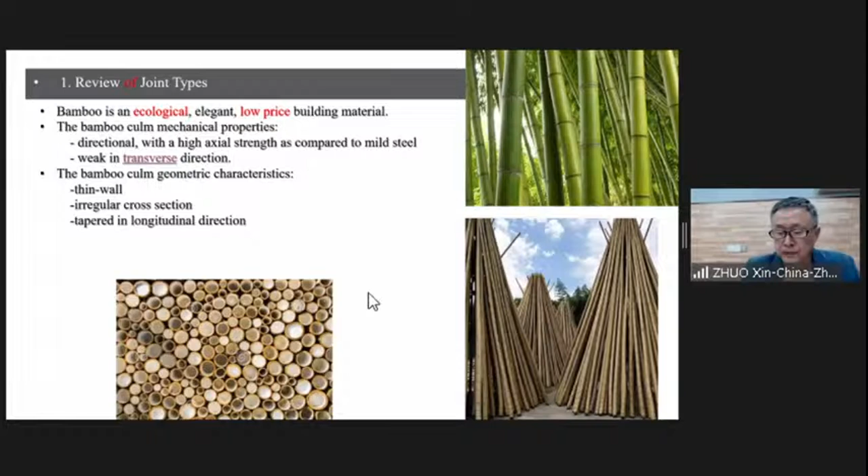Bamboo is an elegant, ecological, and cheap building material. The culm mechanical properties are directional, with a higher axial strength compared to mild steel, but weak in the transverse directions due to the geometric characteristics of the thin-walled, irregular cross-section and tapered in longitudinal direction. Neither can we change the diameter and thickness of culms. The main advanced technologies in timber structures are not suitable for bamboo structures. The joint is the key for structural performance.

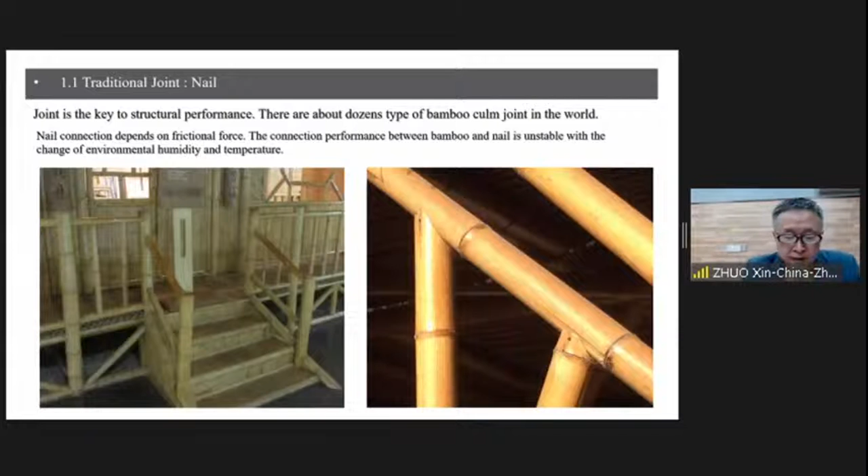There are dozens of bamboo culm joints in the world. Traditional joints use nails, rope, and other materials. For example, fishmouth joints weaken the bearing capacity of the joint. The connection depends on friction. The connection performance between bamboo and nail is variable under different environments. Lashing is the most commonly used traditional joint in the world.

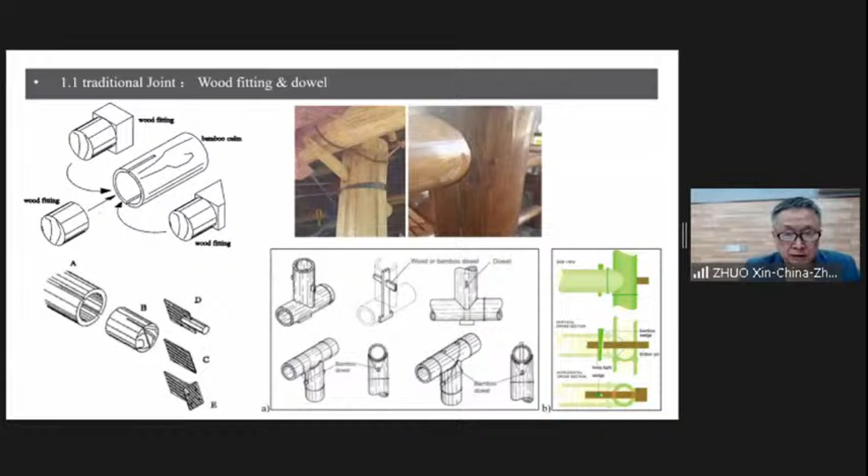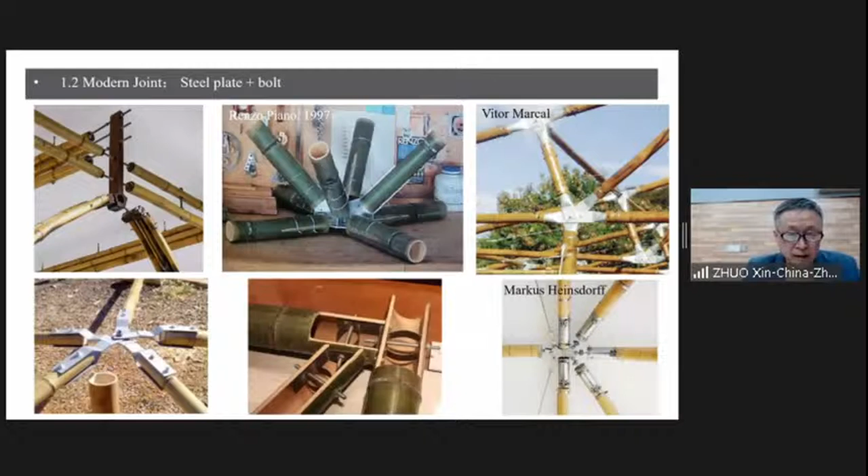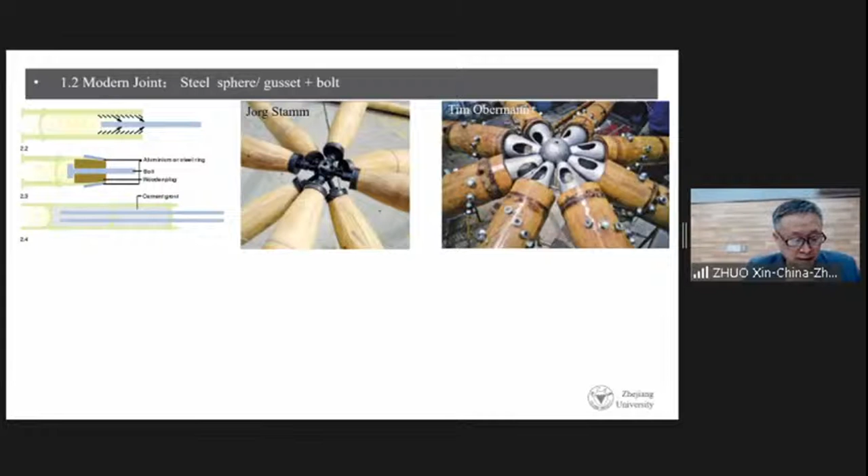In the past decade, many modern joints have been invented by researchers from various countries. These joints are made of concrete, metal, grout, and other materials. Many of them are suitable for special structures. Modern types of bamboo joints have made great progress in the functional diversity and connection performance. However, the price of modern joints is generally high. The cost is very high, and some are even dozens of times higher than the bamboo itself.

Now, we have mentioned most of the present joints. Although they are different in materials or forms, they have one thing in common. They all follow the relationship of line-line connection, which is written in the textbook of structural mechanics. Let's talk about spatial structures. First, each joint connects many members at different spatial angles, which makes manufacturing as well as assembling quite difficult. Second, in spatial structures, almost every joint is different from the other joints, which makes manufacturing and assembling even more difficult.

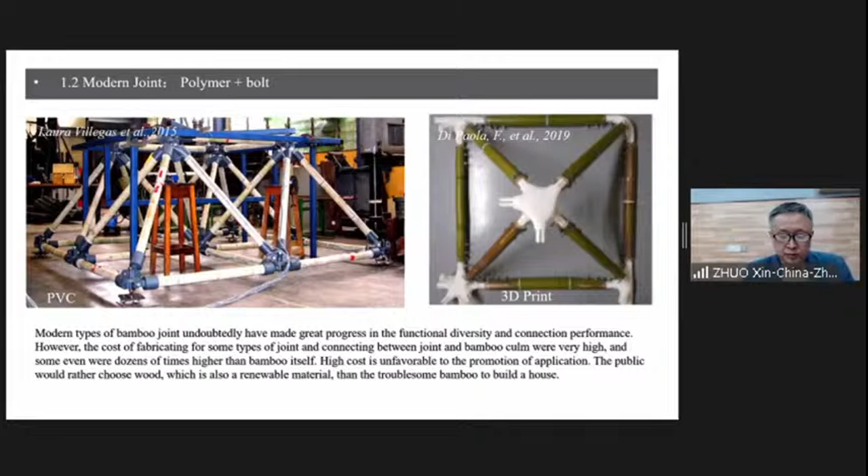In bamboo structures, the main cost is spent on two things. One, the production of this complex multi-directional joint. Two, the connection between the joint and its corresponding members. Higher cost is unfavorable to application. The public would rather choose wood, which is also a renewable material, than troublesome bamboo to build a house.

Next, I'll introduce what my team has done. In my opinion, in engineering application, the simpler, the better. Simple means simple joint, simple equipment, simple operation. Better means low cost and good performance. Four objectives achieved: simple manufacture, convenient assembly, low cost, and reliable performance.

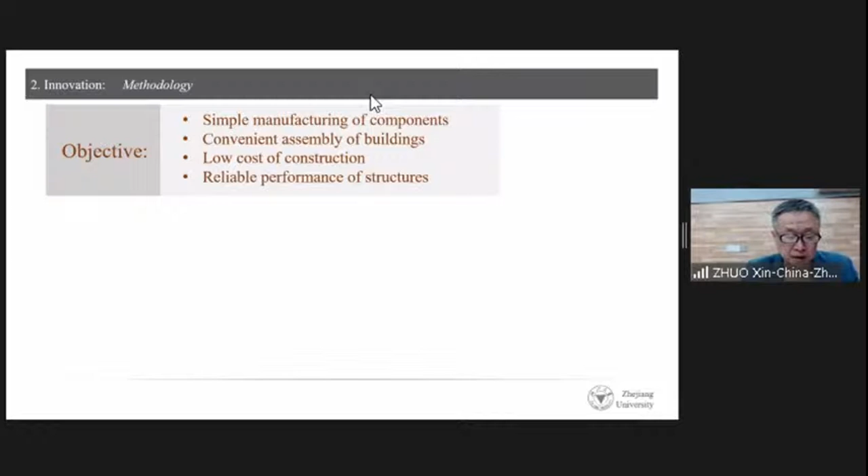4 years ago, I invented a new type of joint named double ring crab, and a new type of bamboo spatial structure named multi-culm bamboo spatial lattice structure. A ring crab is formed by two similar rings with two legs on both sides. Each leg drills a hole. A pair of double ring crab is composed of two ring crabs.

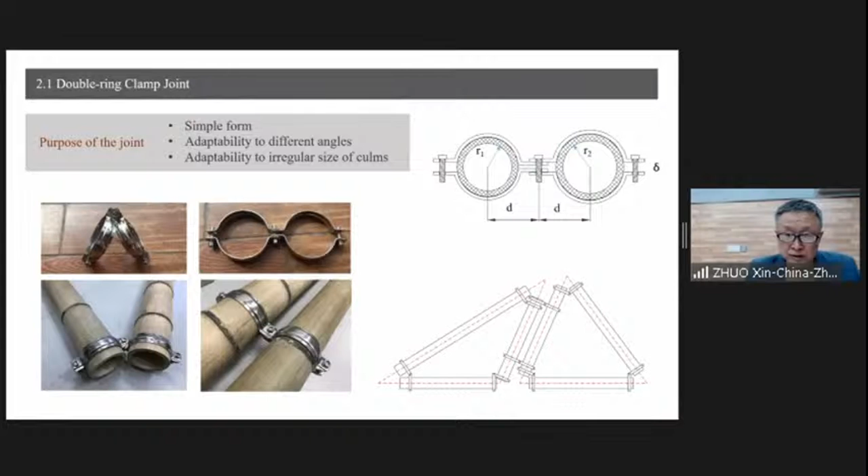A pair of double-ring clamp connects two different R1 and R2 that correspond to two culms. If the distance D1 equals D2, it's easy for manufacture. No matter how different these nearby culms are, the axis position of these bamboo culms will not be affected, either in end connection or in parallel connection. This function is very helpful to control assembly accuracy.

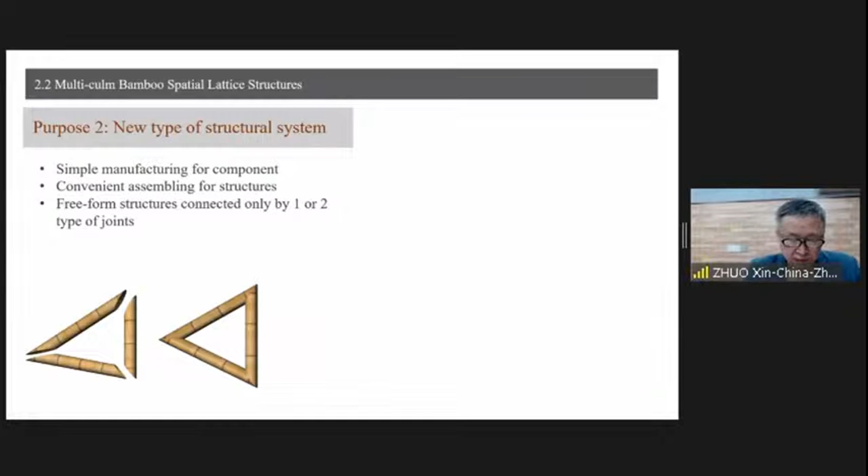And the next invention, a new type of structural system. A bamboo culm looks like this photo. A bamboo culm triangle is formed by connecting the ends of 3 bamboo culms to each other. Multi-culm bamboo spatial structure is formed by connecting neighboring triangles in parallel. If each triangle is connected to the top triangle in parallel, the stiffness and the bearing capacity of the multi-culm bamboo spatial lattice structure can be strengthened.

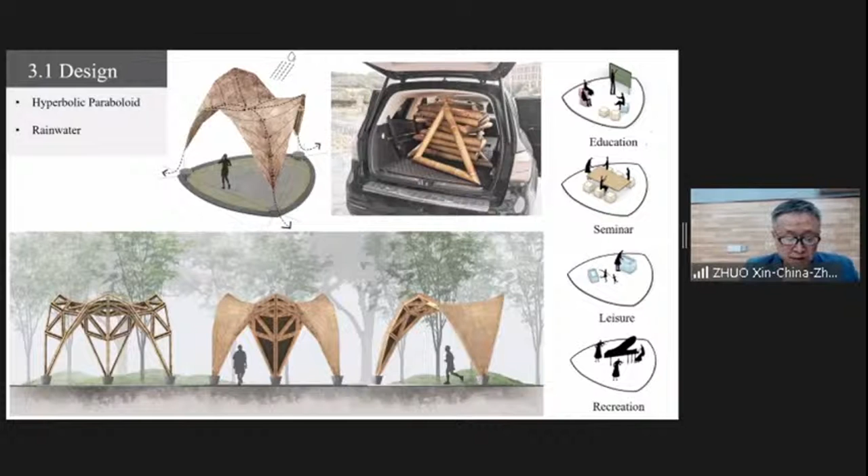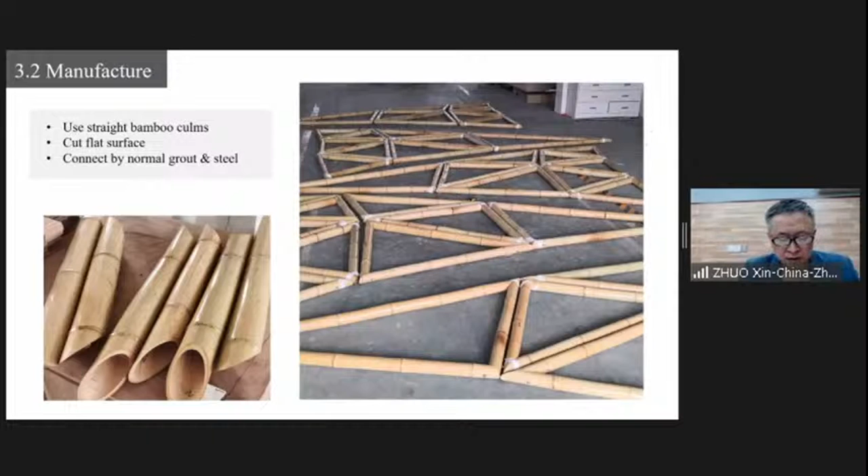Cutting. The culms were cut according to the design lengths, and the 2 ends of each culm were cut according to the designed angle. Connecting. After the culms had been grouped, the corner of each angle was temporarily fixed with tape, and then cement mortar was injected into the corner.

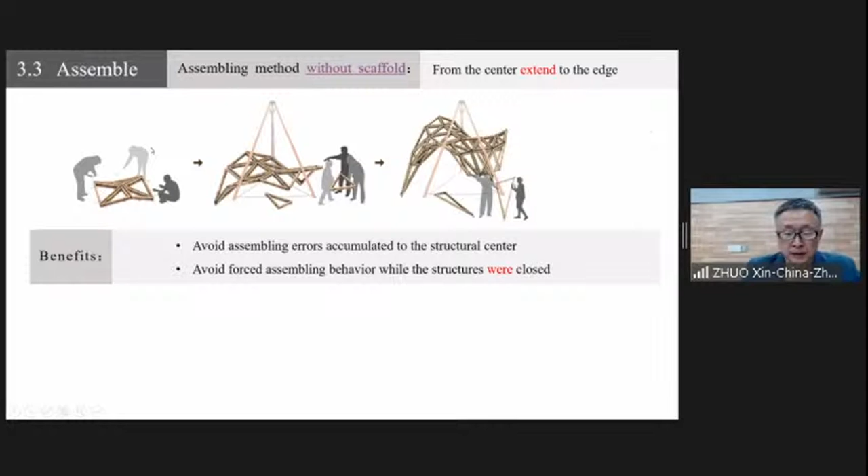We chose the install method, which was from the center to its edge. The whole structure can be completed simply with the help of a tripod and a hand chain hoist. No scaffold was needed. It takes 1 day to build the structure, and the installation of the internal and external decoration was also completed in 1 day.

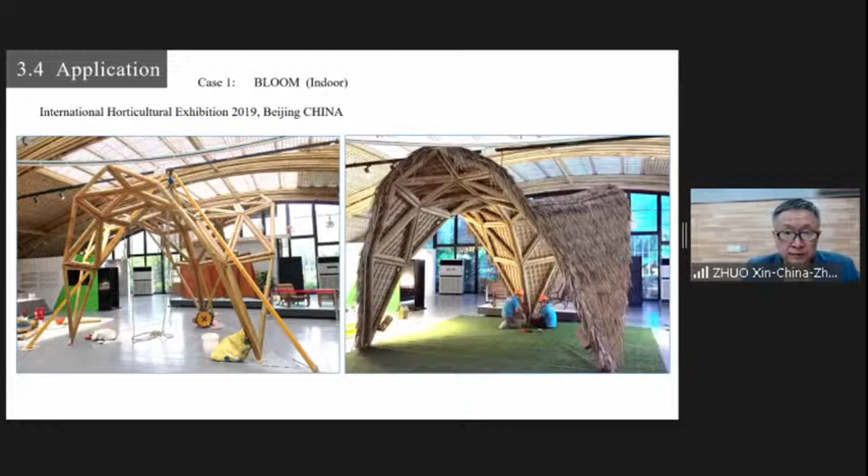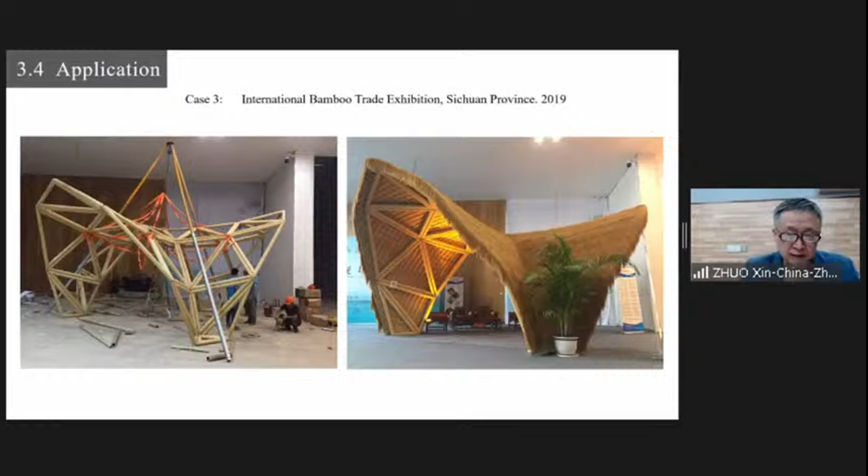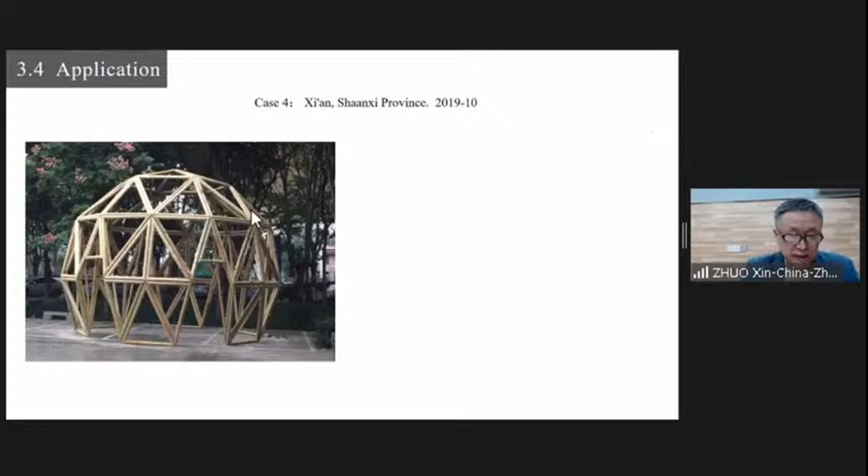Case 4 is in Xi'an. It's a dome. The finished structure had good stiffness.

Conclusion: the feasibility of the invention could be proved by the series of successful engineering practices. The development and popularization of a new structural system needs the support of design theory, which will gradually be established on the basis of a large number of tests and engineering practice.

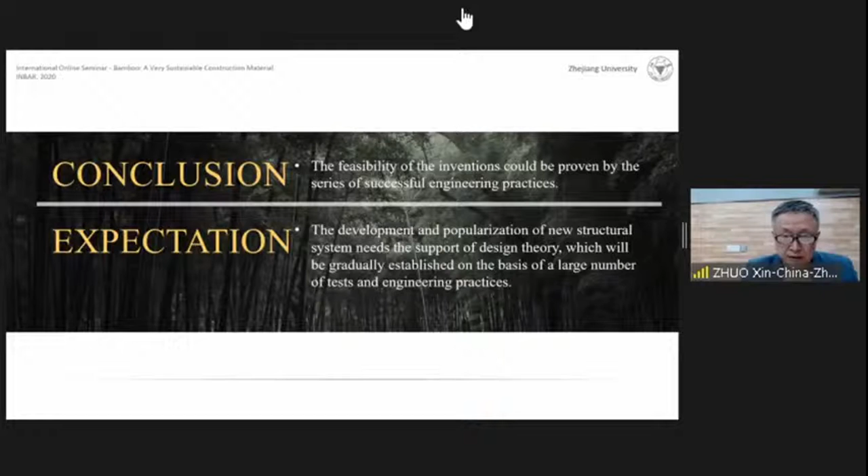So many thanks, Professor Zhuo, for providing us an overview of the joinery types available in bamboo construction, and also an innovative multi-culm bamboo spatial lattice structure. As we know, the triangle is one of the stable forms in construction, and it has wide application. The structure is in the form of components and triangles. It also provides scope for prefabrication and commoditized bamboo houses, and it is also possible to scale it up.

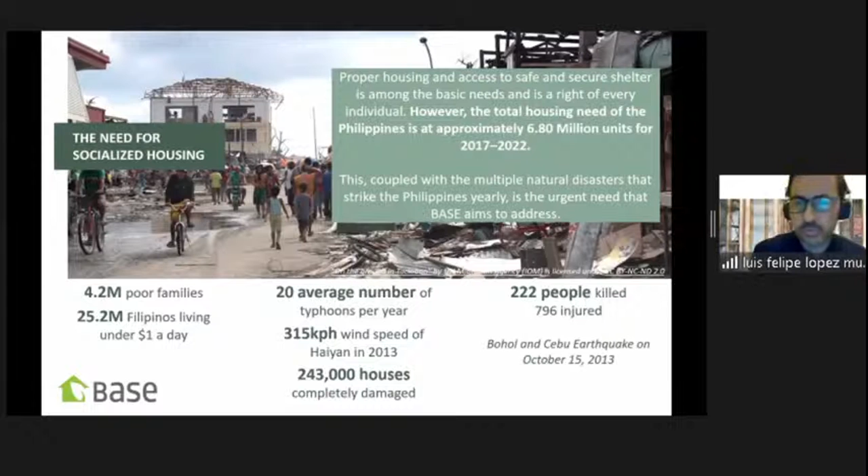At the same time, the Philippines is located in the Ring of Fire of the Pacific Ocean, so we have earthquakes, tsunamis, volcanoes. All the possible natural disasters are here in the country. So there is a lot of work to do in structural engineering, but also in trying to find solutions for housing that is affordable but at the same time resistant.

This story started in 2011 when a German engineer, Corinna Salzer, was working on her master's thesis. She was doing her research here in the country, supported by Hilti Foundation, exploring possibilities to work with natural and local materials for social housing here in the country. In 2012, Hilti Foundation contacted me, and I was working as a consultant together with Professor David Trujillo, and we were supporting the research here in the country.

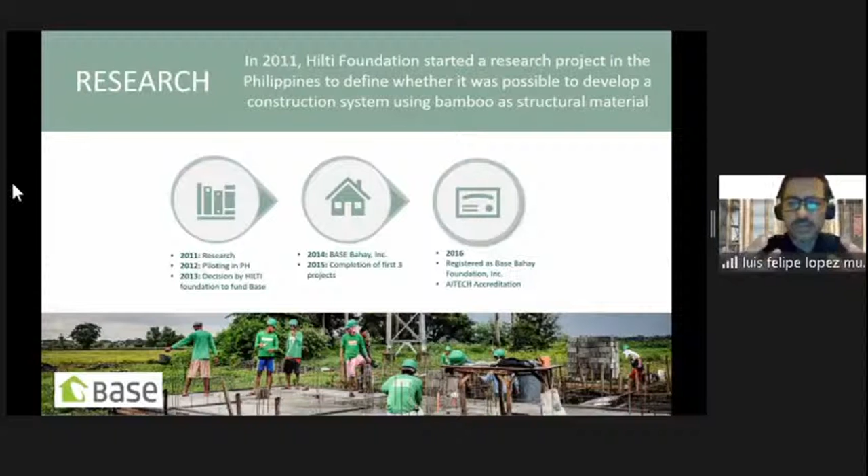In 2014, Hilti Foundation decided to create Base Bahay Foundation in the Philippines. I moved to the country and we started to work on research more deeply, but at the same time building homes in the whole country. In 2015 we completed our first 3 projects. In 2016 we got our AITECH accreditation, which allows us to get building permits in the country.

So Base Bahay is a Philippine NGO fully supported by Hilti Foundation, and our objective is to provide alternative building technologies that enable us to build houses that are affordable, resilient, resistant, and eco-friendly for the poorest people in the Philippines.

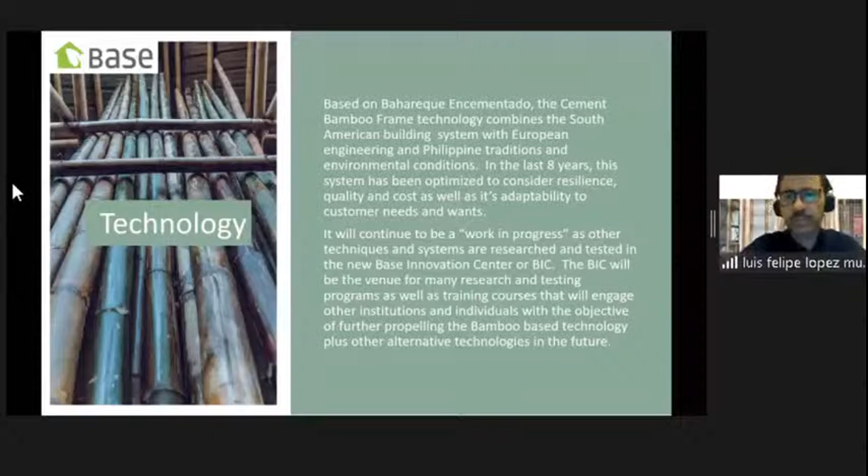Our technology is based, but not copied, I want to clarify, from the bahareque, cemented bahareque or bahareque encementado from Colombia. But we need to understand that in South America, especially, there are no typhoons, so the structures are more designed for earthquake resistance, not typhoon resistance. In the beginning we took some components of the bahareque technology from Colombia, especially because at that time the bahareque technology was already included in the building code in Colombia. That helped us a lot because it's a system that is already normalized. Even other countries like Ecuador and Peru already include this technology in their building codes.

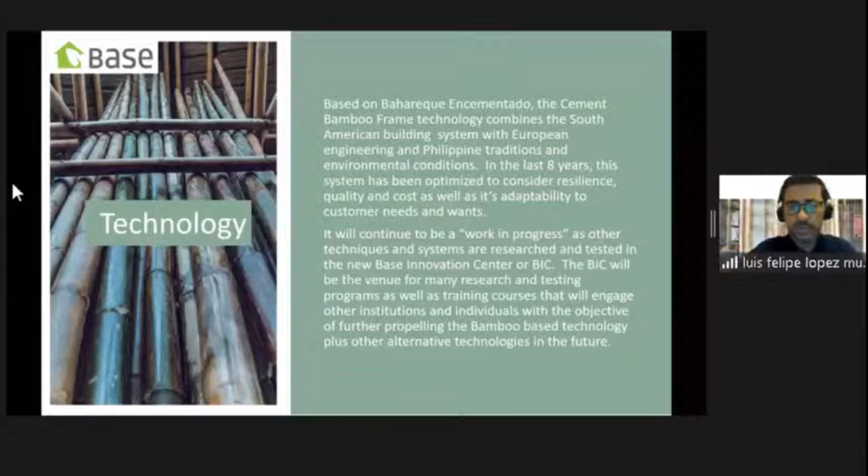So we took that technology as a start, but we had to improve a lot of connection systems and reinforce the construction more to resist the strong winds and the uplift during typhoons. At this point I just want to clarify that when we are talking about bahareque or cement bamboo frame technology, as we call it here in the Philippines, we are not talking about this kind of bamboo structure that I'm showing you all at this moment on the screen.

These are more like three-dimensional trusses or space trusses, very common in the work of Simón Vélez, for example, or other architects around the world. Beautiful structures where bamboo is the main structural component. But in the system we're working with here, as you will see in the coming slides, we are working more in a system like a shear wall or a structural wall system, where the walls are the structure of the construction. That means they're responsible to resist vertical loads and horizontal loads.

This technology, as I mentioned, originated in the 19th century in the coffee region of Colombia. Here are some samples of the construction techniques used at that time. You can see that even 3-story and 4-story buildings were normal then. The system is just a frame made of bamboo, sometimes with timber, using flattened bamboo as support for the plaster, with a cement plaster once cement was available, and before that, the people used lime with some animal excrement.

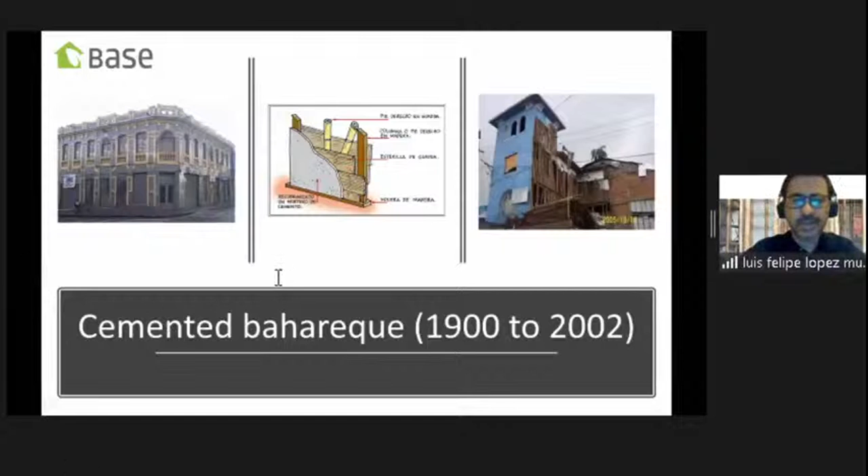Coming to the Philippines in 2012, we decided to use the bahareque system as a base. But the species of bamboo in the country is completely different from the species we have in Colombia. In Colombia, you normally find Guadua angustifolia Kunth, but here in the Philippines, the most common bamboo is called Bambusa blumeana, or locally Kawayan Tinik. So the first task was to determine the mechanical properties of Bambusa blumeana and also the resistance to conventional connections using bolts, and even plus mortar cement inside the internodes to check the resistance.

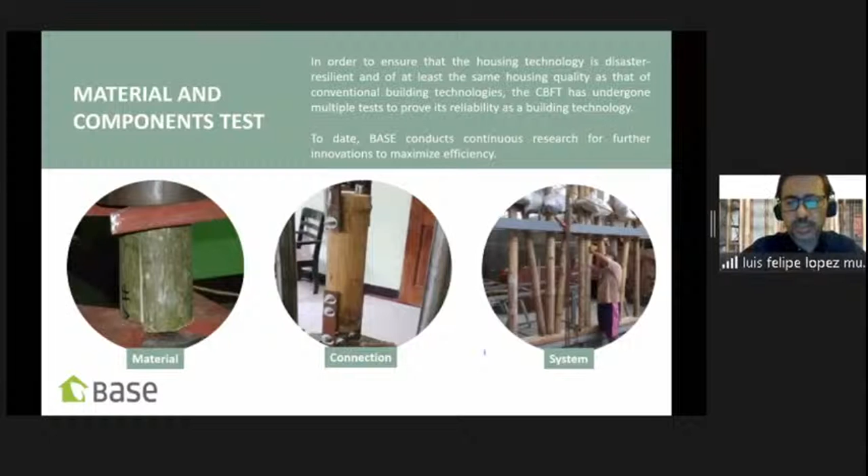So we made tests for mechanical properties, connections, and walls. Here are some pictures of the tests we are doing. These are new pictures, not from 2012 - these are from this year, in our new laboratory that I will show you.

For the tests we did in 2012, we used ISO 22157, the previous version. Here is some data of the results we got at that time: compression parallel with a characteristic value of 20 megapascals, shear parallel 4.1 megapascals, tension parallel 97 megapascals, tension perpendicular 0.53, bending 53 megapascals, and modulus of elasticity 17 gigapascals.

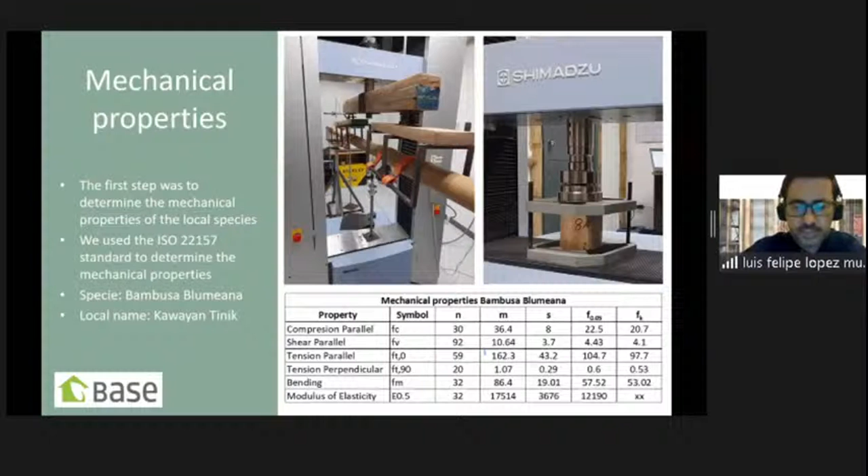We also made some tests for Dendrocalamus asper, or giant bamboo, that grows very well here, especially in the southern part of the country, in the Mindanao Island region. We have already conducted tests like compression parallel, shear parallel, and tension perpendicular, getting characteristic values of 43.7 for compression parallel, 6.3 for shear parallel, and 0.33 for tension perpendicular. We are still testing this bamboo - in coming days we'll be testing the bending and the rest of the properties.

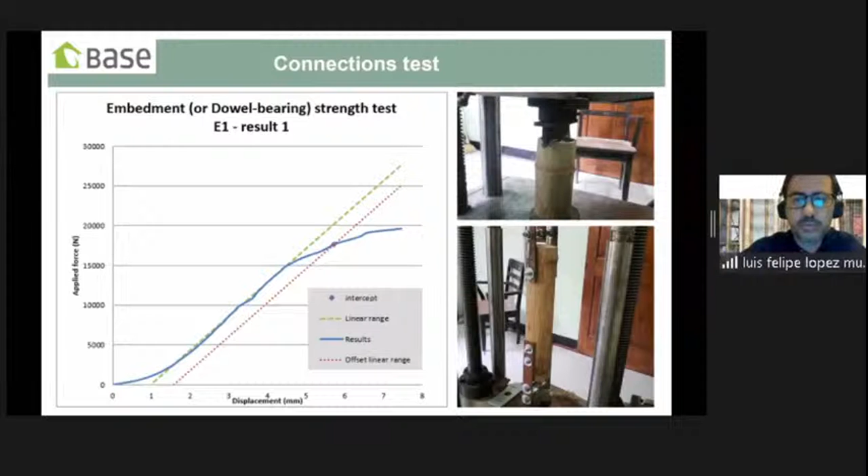We also test walls, shear walls, starting from just the frame, adding the bamboo mats and the plaster. We test different kinds of matrix like flattened bamboo, ribbed lath mesh, chicken wire mesh, and using cement plaster to check the resistance.

Internationally, we also conducted some tests in Indonesia for shear walls using Indonesian bamboo species. We did this together with the Bandung Institute of Technology, ITB. There we made some tests also for shear walls and mechanical properties of Indonesian species.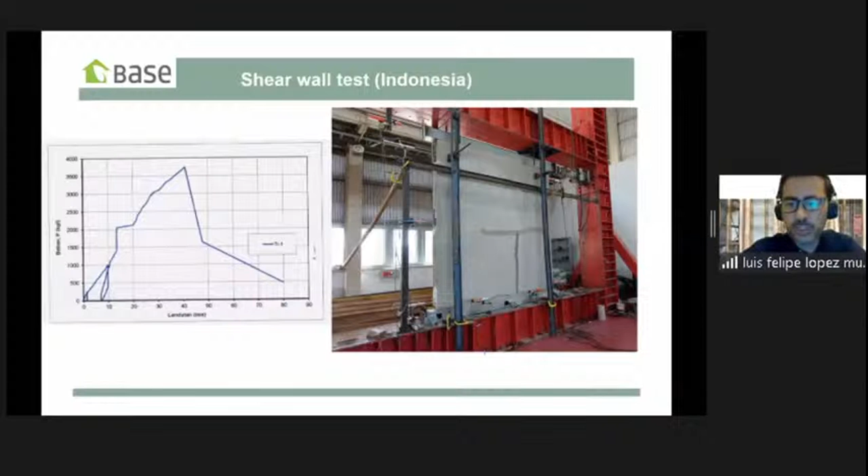And even in Indonesia, also with ITB, the Bandung Institute of Technology, we made some tests for fire resistance, using ISO 834-1 to determine the resistance of the bamboo walls against fire.

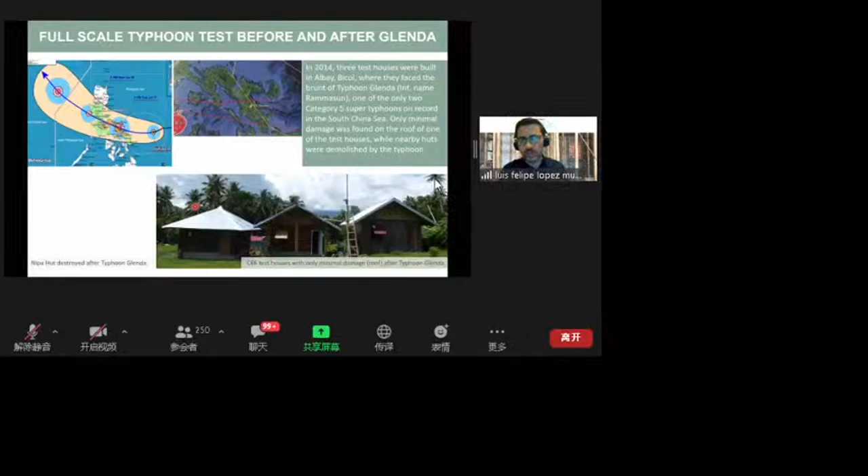One big question about the research, about the system, if we can use it here in the country, is if these construction houses can resist typhoons or not. Because as I mentioned before, in Colombia, where the system originated, we don't have typhoons or hurricanes. Only the north part of the country in the Caribbean Sea can be hit by typhoons, but in the central part of the country, there is not this kind of natural event.

So we decided to make a test with 3 full-scale houses that we built in a province called Bicol, in a town called Guinobatan. You can see here part of the Luzon Island and the Bicol province, and this yellow pin is the location of the houses. So why did we choose this location? Typhoons here have winds more than 220 kilometers per hour.

So we built these 3 houses. We installed a weather station, a satellite weather station, where we can monitor the wind speed, and we just wait for the typhoon. These houses were built in 2013, and in 2014, around 6-7 months after we finished the houses, we had the first typhoon hitting these houses.

It was Typhoon Glenda. It was a super typhoon, category 5, and we were recording the wind speed during the event. After a few days, we were able to reach this place and take this picture. You can see the condition of the house is good. The house didn't suffer any damage.

Only this small broken GI roof, which you cannot blame on the system. It's actually a problem of how the roof was fixed to the structure, but in any case, there is not a damage that compromised the stability of the house.

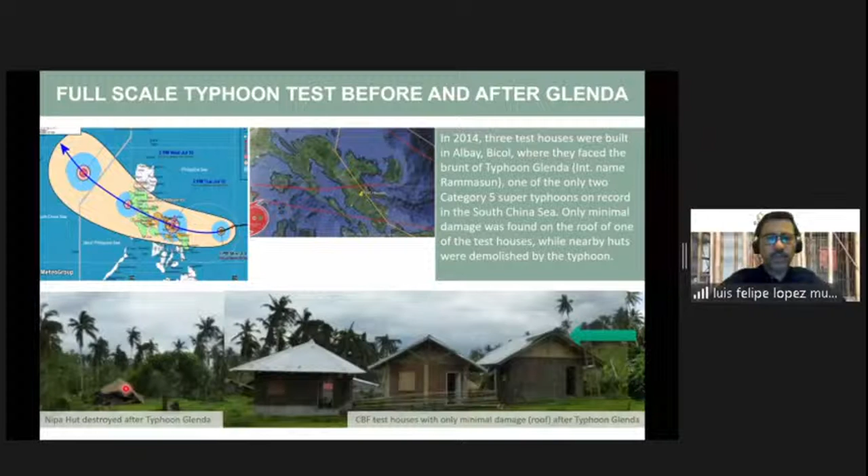So at the end, we developed this system that is typhoon resistant, earthquake resistant, fire resistant, and insect resistant, because we treat all our bamboo poles with a very good treatment method that allows us to be sure that the insects will not eat the bamboos. I won't speak more about treatment because I know Sebastian was talking about that in the last presentations.

So here you can see more in detail the components of the house. Starting from top to bottom, we have a roofing system using any commercial material. You can use galvanized iron sheets, clay tiles, shingles, asphalt shingles, whatever you want to use is compatible with this system.

Supporting that, you have a kind of truss or frame system in the roof using purlins and rafters, but for that we always use bamboo and sometimes a combination of bamboo and wood. The structural main system is a shear wall system made of frames of bamboo. We call it cement bamboo frame system or cement bamboo frame technology. We use studs made of bamboo, and horizontal elements made of timber to avoid the use of fish mouth connections. That allows us to prefabricate the walls very easily and reduce the cost of the house.

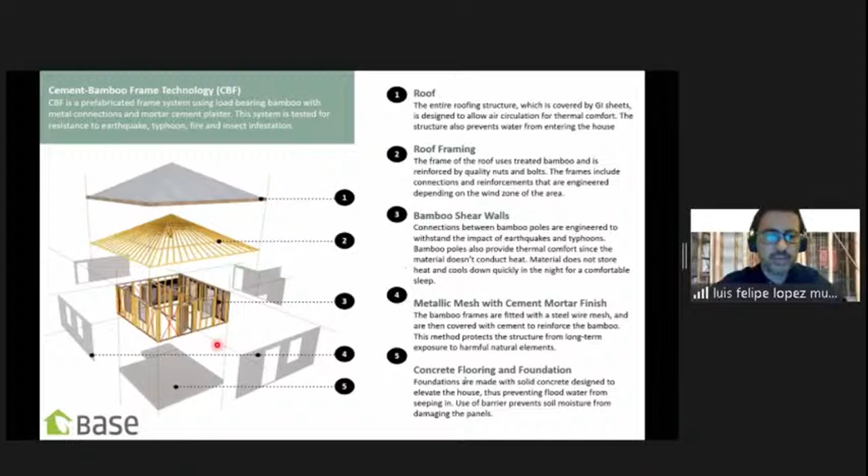When you are building social houses, every single peso, in this case, because peso is the money in the Philippines, every single peso that you save is money for the next house. So we need to be very careful about the cost of these houses. And at the end, you have a concrete foundation, a conventional foundation using footing beams and a concrete slab.

As I mentioned before, we got the AITECH accreditation in 2016. This is an accreditation given by the National Housing Authority here in the Philippines. With this AITECH accreditation, we are able to build these houses legally and get building permits, even if the system is not yet included in the building code. So we had to prove to the National Housing Authority that our system is safe, is a good alternative for social housing construction, but especially that we need to guarantee that the houses will not fly away in the next typhoon or collapse in the next earthquake.

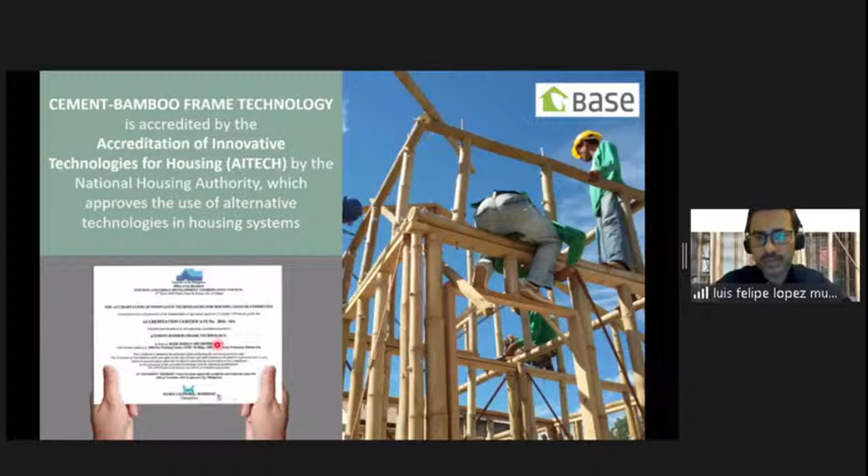So we need to show them all the proofs of the tests that we did.

I don't want to go into this too much because you already know why bamboo is good. It's a sustainable harvesting and good income material. It's strong, grows so fast, and the carbon footprint of a bamboo house will always be less than a concrete or steel house.

So one thing we had to do here in the Philippines when we arrived was create the entire value chain for bamboo. It's true the country is full of bamboo everywhere, but there's no industry for the production of bamboo. So we needed to develop a value chain with the people of Base Bahay, the team that does incredible work, working very hard to create these facilities together with other partners around the country.

We have a team of local engineers, and I want to clarify, I'm the only foreigner in Base. The whole team is Filipino, and they work so hard to make all these things happen. They go to the provinces, work with local farmers, and create these facilities, helping them build and process the bamboo.

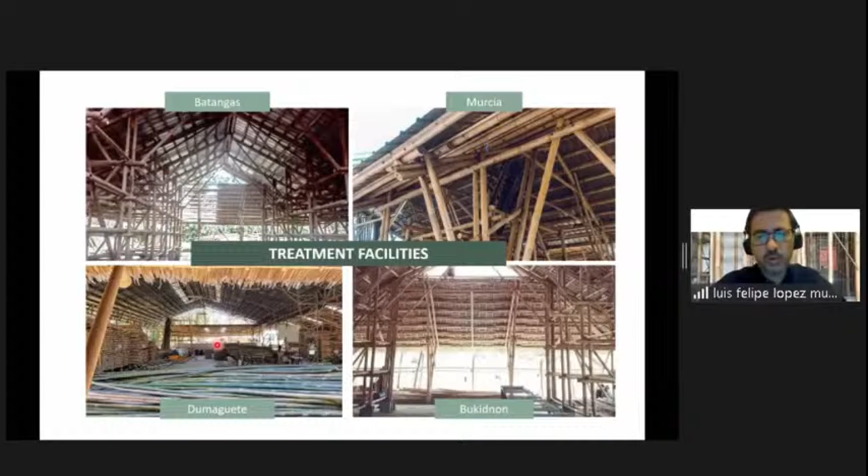Right now we have installed capacity for production of something between 8,000 to 10,000 pieces of bamboo per month. Unfortunately, during this year, production is very low because the pandemic hit the Philippines very hard.

So these are some of the model houses we are building in the country. We have 2-story houses, duplex houses, bungalows, and even row houses of up to 4 houses all connected.

Some of our projects are almost in the whole country. We are soon starting a project in Mindanao, the last province where we don't yet have a build. We are starting a project in January, 50 houses in Bukidnon province in Mindanao.

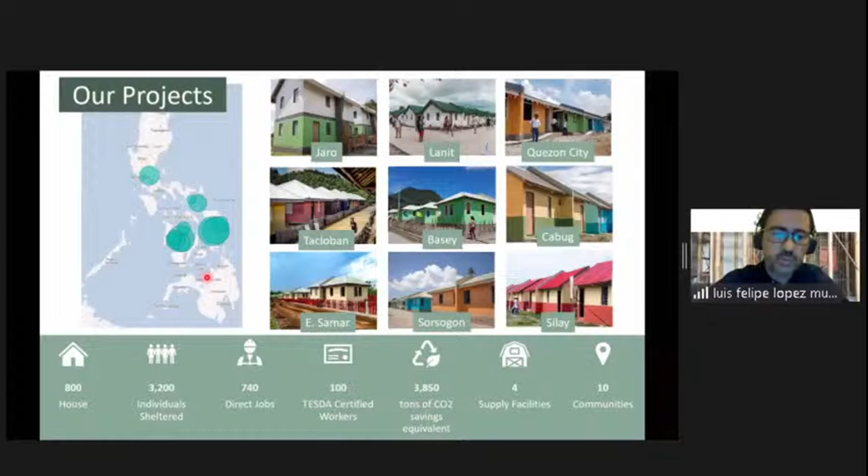Until now, we have already built 800 homes, giving shelter to more than 3,000 Filipinos, creating direct jobs and saving a lot of carbon, with more than 10 communities built in the country.

Aside from that, we started our first international project this year in Nepal. It's a project completely supported by Hilti Foundation, with all the technical support from Base Bahay, and the implementing partner there, the main partner in the country, is Habitat for Humanity. During this year, even during the pandemic, we were building 34 homes in the province of Jhapa in Nepal. Hilti Foundation has already approved 50 houses for next year in Nepal.

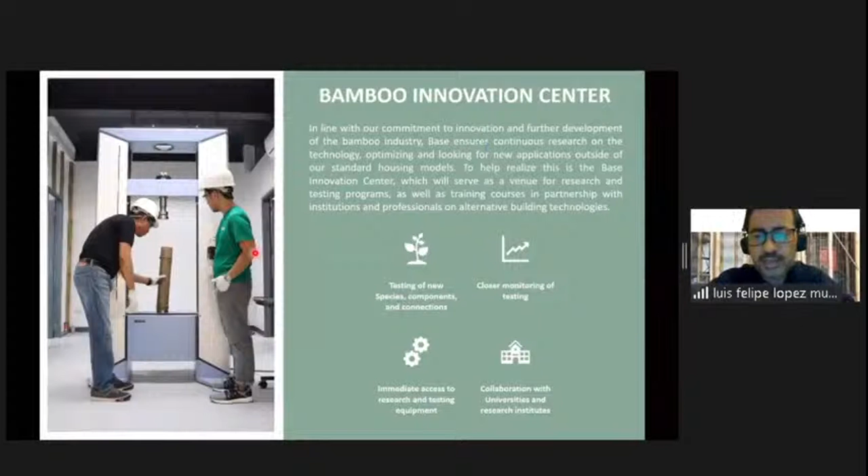With these communities, we also work on building communities for social work or even livelihood projects. Aside from all these social projects, last year Base Bahay together with Hilti Foundation decided we wanted to go one step forward and create the Base Bahay Innovation Center. That's a laboratory focused on research of sustainable materials, with emphasis on bamboo construction, of course, but open to other materials like wood and whatever is new in the market. It's a small laboratory, but the interesting thing is we are focused on bamboo, so we can make a lot of tests.

Right now we have a universal testing machine where we can determine mechanical properties. We are finalizing the setup of our reaction frame where we can test more walls. We also have an area where we can make full-scale construction models. On the right side of the picture, you can see we have a full-scale house where we can test new components, or train people to build with this technology.

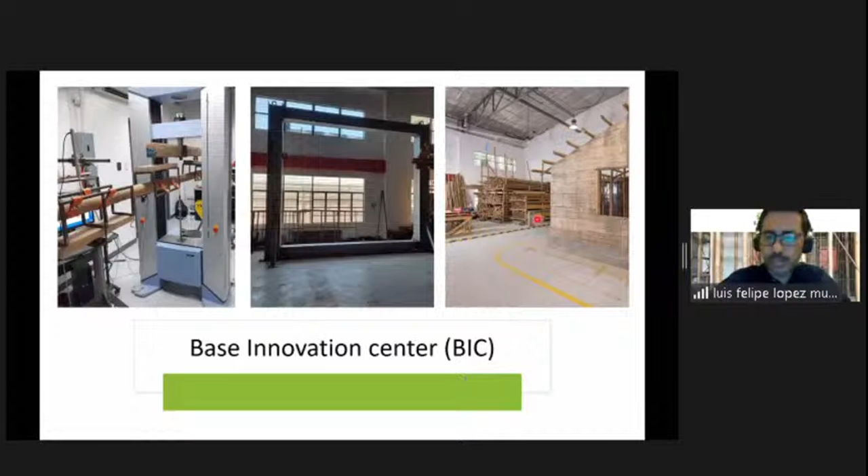The Innovation Center right now is making agreements with international organizations and universities to promote bamboo research. Of course, our main donor and partner is Hilti Foundation. Our main local partner here in the Philippines is La Salle University, with whom we've been working for more than 3 years doing research. We are signing MOUs with international universities like Coventry University and Mara University from UK and Malaysia, and we have 3 agreements under negotiation, one with Hong Kong University of Science and Technology, another with Pittsburgh University, and the last one with Universidad del Valle from Colombia. Aside from universities, we are also working on research with ARUP, together with Sebastian Kaminski, who is also part of this forum.

So we want to create a network of institutions that promotes the use of bamboo, and also help students who believe in this technology and support them in research in their countries, but also help people who want to work with bamboo here in the Philippines. So we want to create knowledge that can be used for building codes, and also improve technology and reduce costs of construction with bamboo, making the system more competitive in the future.

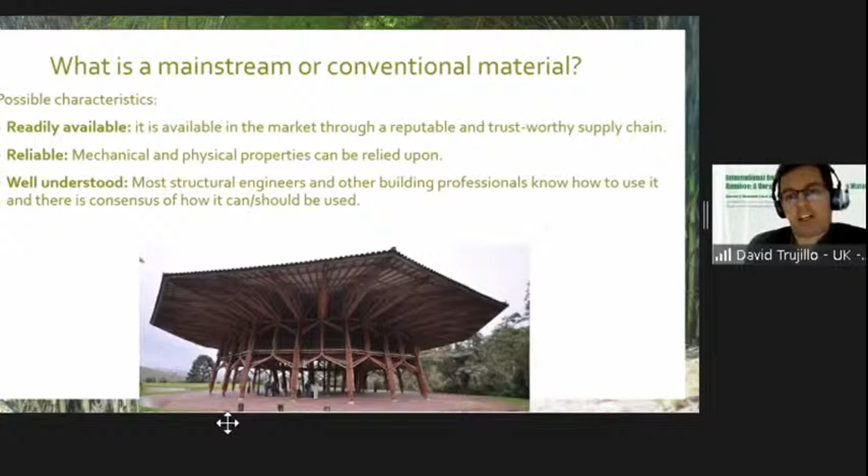Reliable. We need a material that has mechanical and physical properties that can be relied upon. It needs to be well understood, so most structural engineers and other building professionals know how to use it, and there is a consensus of how it can and should be used. And legal to use. We have national legislation as well as codes and standards that support its use.

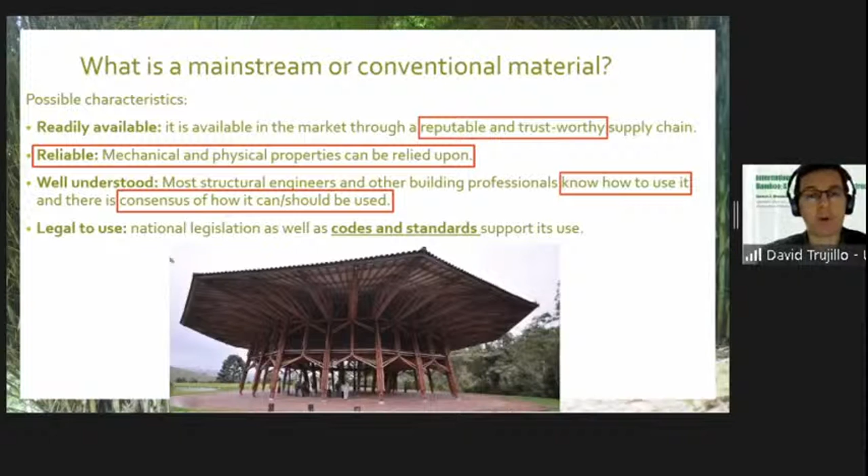So in my mind, these are the characteristics of what would be a conventional or mainstream material. You might think of some more, and I'd be really keen to hear what your suggestions are. So we need codes and standards to ensure that we have a reputable and trustworthy supply chain. We need codes and standards to help us ensure that the material has mechanical and physical properties that can be relied upon, and codes and standards that help us to know how to use the material. And hopefully those codes and standards reflect a consensus of how it should be used.

So throughout the 21st century, we have had a gradual process of development of standards and codes across the world. Interestingly, the first one was actually from California, but it's a very simple document, and it doesn't provide you any details of any species, mechanical properties, how to design a beam or column, a connection, a shear wall, or any grading. All it tells you is how to derive some design values.

Luis Felipe earlier mentioned that in 2002, there was a design standard that told you how to design some elements, primarily shear walls of the bahareque system, and it had a very, very simple procedure to design columns. It also had some guidance about how to build connections, not how to design them, and some guidance of how you should grade bamboo.

As we move forward, I think one important breakthrough, a very important code, was the NSR 10 from Colombia, which, as you can see from this chart, ticked many boxes. It only was for one species, but it stated the mechanical properties for it. It told you how you could derive the values, how to design beams, columns, connections, shear walls, and it had some guidance on how to grade the material.

There have since been several developments in Peru. There's an Andean standard in Ecuador, in Mexico, and I might be skipping something from somewhere else in the world. But I think, in our opinion, the significant breakthrough will be coming next year with ISO 22156, because it ticks directly or indirectly all the boxes. It doesn't specify any species, but you can find the mechanical properties through using ISO 22157. And it is accompanied by a full grading standard, which is ISO 19624.

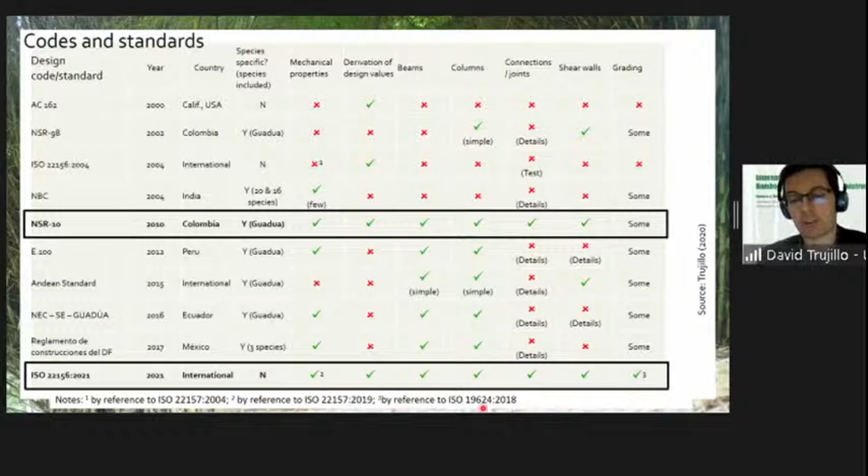So here are three recently developed ISO standards around the use of bamboo culms. And this is the one that we're expecting next year to be released. So a bit about the journey of how we got to these standards.

So we have ISO Technical Committee 165, the committee where the original ISO standards about bamboo were developed in 2004. In 2013, we felt that it was important to reactivate our presence as INBAR in ISO Technical Committee 165. And so at that meeting, working group 12 was created, bamboo structures.

In January 2015, we also felt it was important to have a task force that supported the development of these standards and other activities. As I mentioned, we have two ISO standards that have already been published. One of them is a revision of the original 2004 version, and we have coming soon ISO 22156, which we expect will be published in 2021.

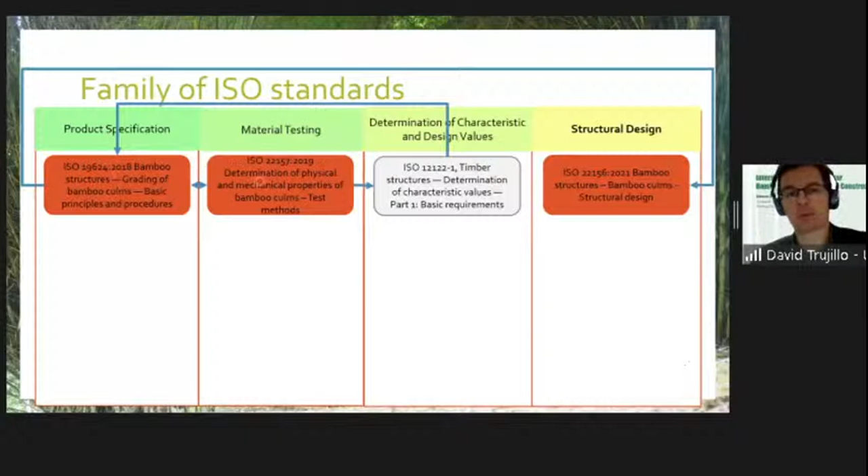So we've decided to harmonize across standards. And so, for example, ISO 19624 makes reference to 12122. And we've done a similar sort of situation with the standard that will be released next year, ISO 22156. It is linked to ISO 19624 as well as 22157, and to many other ISO standards that we're borrowing concepts from to feed ISO 22156.

So let me tell you a bit about what we've done in these standards. ISO 22157, what we have basically done is we took a good look at the existing standards and tests, and we introduced some new tests. As I mentioned, we harmonized with ISO 19624, but we also harmonized it with a timber standard for testing in timber so that they follow a similar format.

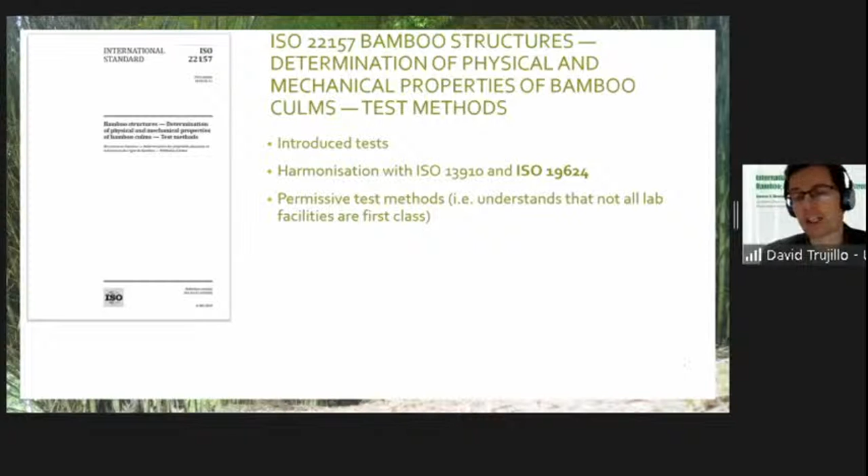And we've also ensured that we have permissive test methods, and that is that we understand that not all lab facilities are first class. So you might have some lab facilities that are not so good, and so how can you adapt the test to those lab facilities?

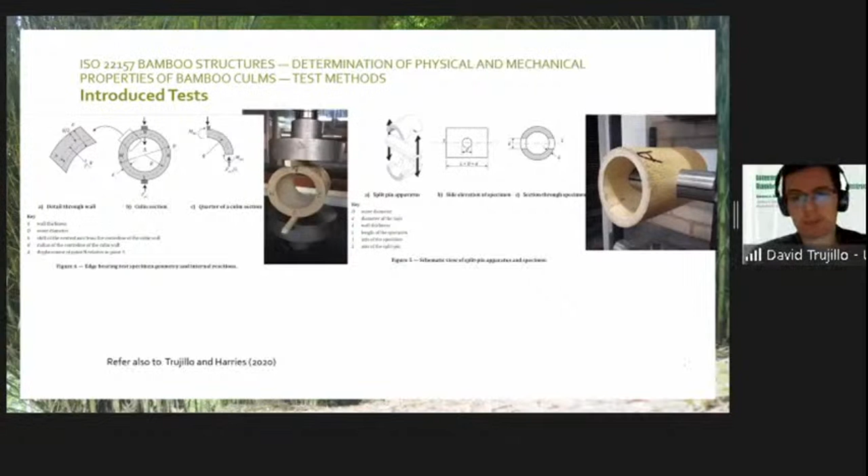In the introduced tests, we introduced the edge bearing test, shown here, and we have introduced the split pin test, shown here. Both of these tests are referring very much to the properties of the matrix of the bamboo more than to the fibers, which sort of relates to the work in Kent Harries' presentation on this subject.

In terms of grading, prior to ISO 19624, grading was a fairly simple procedure across the world in standards. Generally, what you find in codes and standards across the world is that they'll have some requirements to check what species, what taper, what bow, what fissures, what rot, what insect damage and maturity level are tolerated. And if it complies with everything, you just say it's structural grade. And if not, it's rejected.

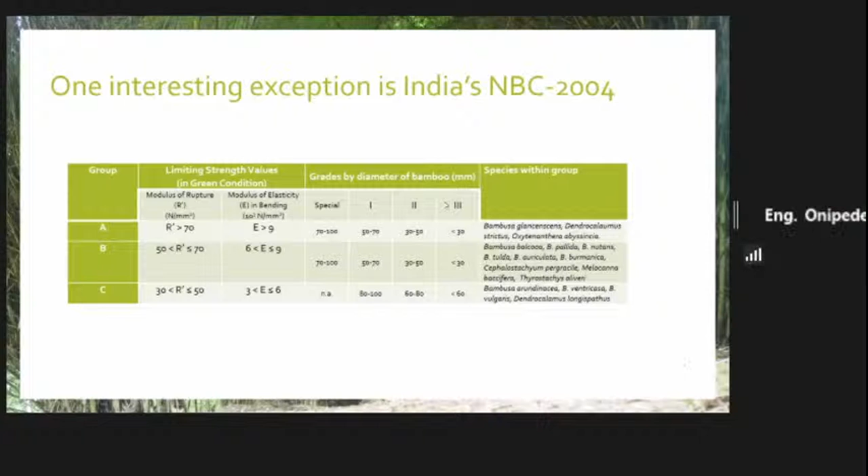There is an exception, which is quite an interesting exception, India's NBC from 2004. It has a range of diameters and requirements for modulus of elasticity and so forth, but it's not very clear about exactly how it works. I've summarized the two tables that it contains, and this is what you get if you merge the two tables. One interesting concept about this standard is that it grades by diameter of bamboo. It suggests that you could grade by diameter of bamboo, and it's a really interesting idea that we will come back to later on.

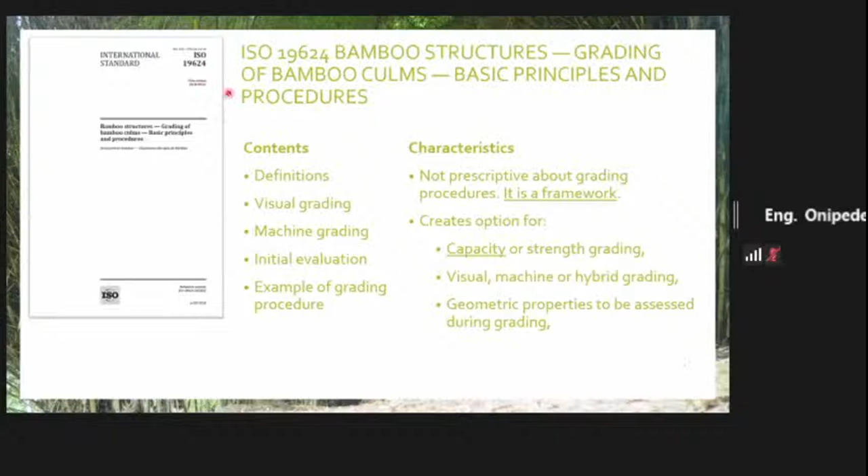Common challenges. As I mentioned, ISO 19624 is a brand new standard that was published in 2018. What does it cover? It has definitions, it has visual grading, it has machine grading, it has something called initial evaluation, and it even provides an example of how grading could work. It's not mostly prescriptive about grading procedures. It's not prescriptive how you have to grade. It's simply a framework of how you could create a grading procedure.

It creates an option for capacity or strength grading. So we introduce a concept that's not common in timber, but we felt is more appropriate for bamboo, and we'll be discussing this later on, which is capacity grading instead of strength grading. We have the option of visual, machine, or hybrid grading, and it tells you what geometric properties to be assessed during grading. So in terms of visual grading, it's a fairly straightforward process, as you can imagine.

We have something called condition properties, which is insect or fungal damage, the presence of fissures, or what we've called longitudinal indentation, which is also like a fissure but towards the inside. We have requested that people check diameter, wall thickness. You might want to consider internode length if that is relevant to you. You might want to consider what the lengths of specimens you want to grade are.

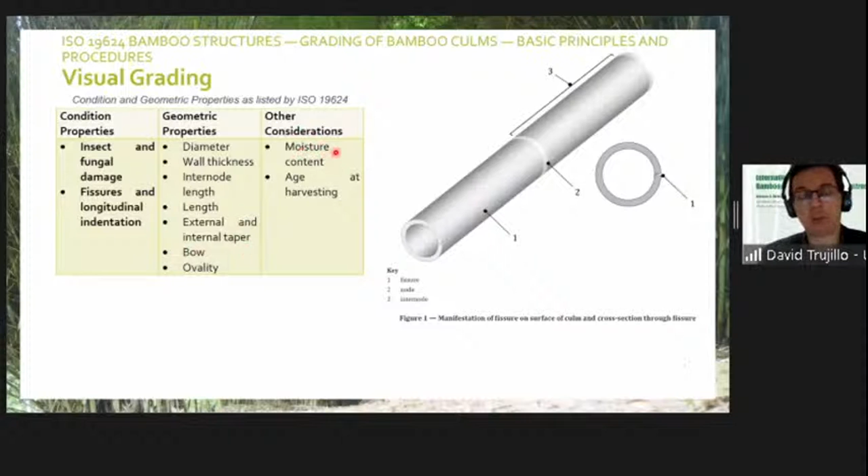You might want to check external and internal taper, bow, and ovality. And we've also mentioned other things you might want to consider during grading, which is moisture content and age at harvesting. How could it work?

It could be very similar to what I described earlier. You could just say, okay, let's check the condition properties, taper, bow, and ovality. If it passes all, then you accept it. If not, you reject it. So you say this is bamboo of structural quality.

Then you might want to add another step, which is that you grade by diameter. And so you might want to check the diameter or maybe the wall thickness, and you assign it to a grade. You might want to assign it to another grade or reject at this stage.

One of the things that is new, that is not contained in any code or standard of bamboo that I know of, is that we have something where ISO 19624 is prescriptive. One of them is the process of creating grading rules for visual grading. It is prescriptive about how you go about sampling. It is prescriptive about the determination of mechanical properties and the requirement of something called periodic evaluation.

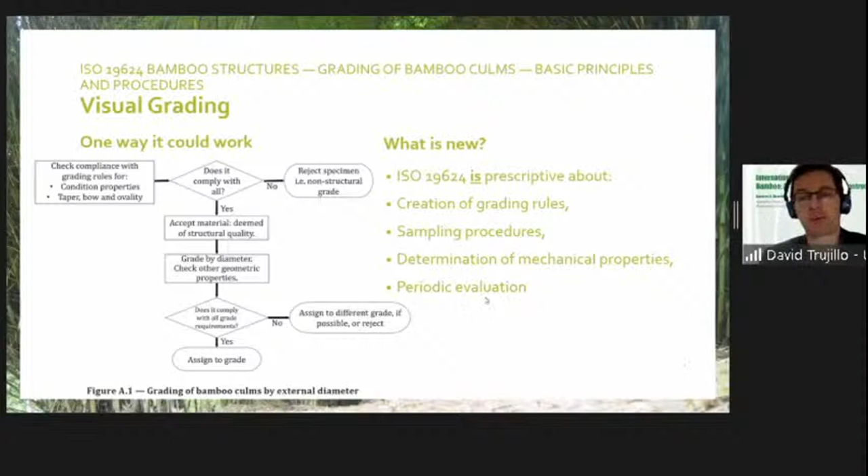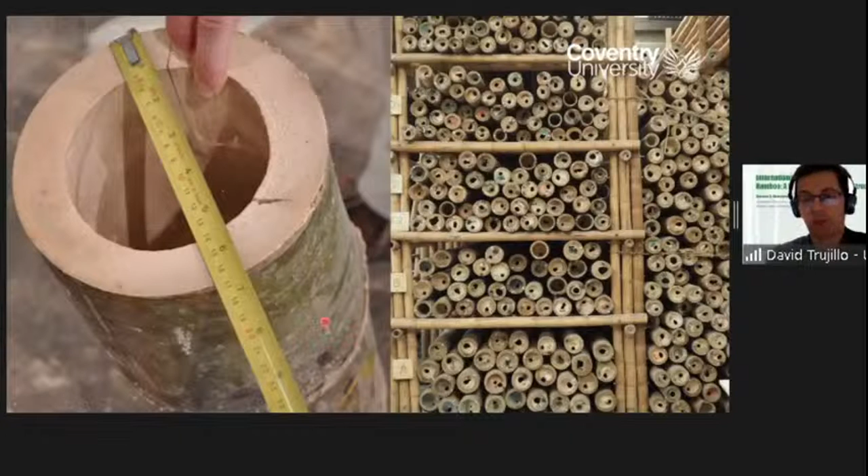Current machine grading of bamboo culms around the world, well, I don't think anyone is doing machine grading of bamboo around the world. Correct me if I'm wrong, please. But what is machine grading? ISO 19624 defines it like this. Machine grading will be understood to be the process of sorting material by means of measuring one or more indicating properties known to correlate to grade determining properties.

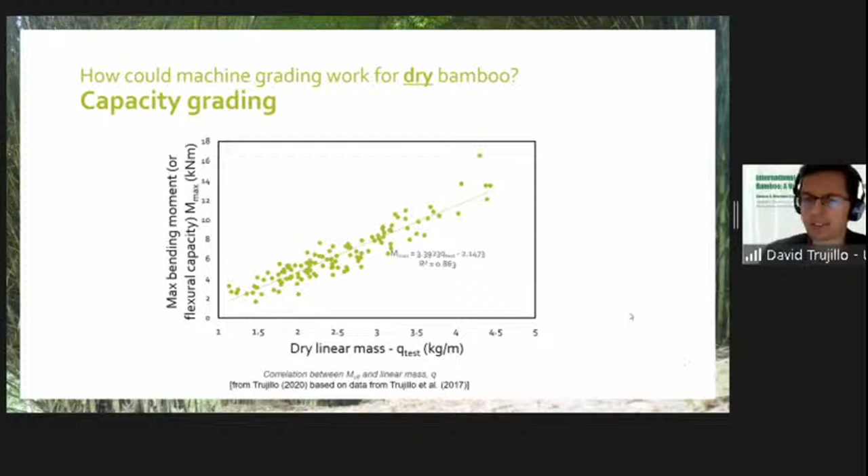On this axis, we have the bending moment at failure, or we could also call it flexural capacity. And on this axis, you have the linear mass. That is, the weight per meter, or the mass per meter of the specimen that was being tested. It has to be dry, because otherwise you wouldn't know how much is dry material and how much is water. And we found this very strong correlation between linear mass and bending moment at failure. So that told us, oh, this looks like something really promising.

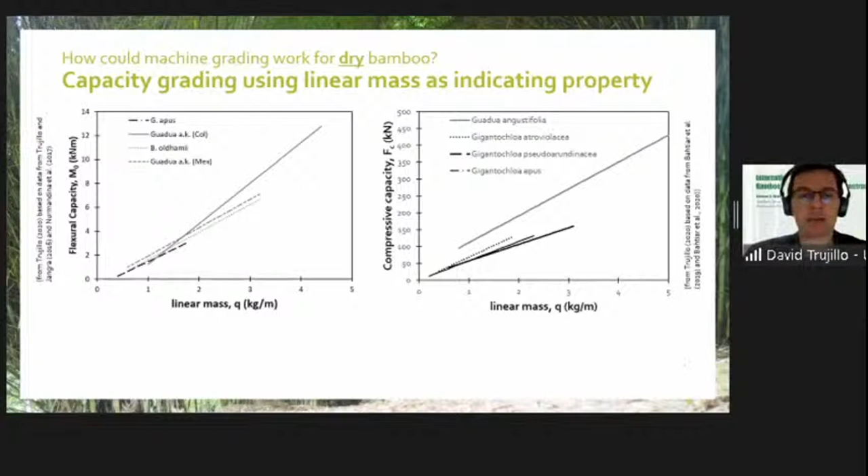Now, another thing that Effendi Bahtiar found, and that we explored, but he had a bit more success with, and then we've gone back and looked at the same process, is that if you put here on this axis the product of Q, being linear mass, times external diameter, you get some really interesting findings. It improves the quality of the predictions, and it seems, though we need more data on this, that species start to maybe fall into line or very close.

So this is for Gigantochloa apus, and this is for Guadua angustifolia. We've got a broader range of Guadua. And for predicted flexural stiffness, we also seem to get a pattern if you use Q times D squared. So suddenly you could predict the capacity properties of culms by just having knowledge of two things, diameter and linear mass. So how could machine grading work for bamboo?

ISO 19624 presents the concept of indicating properties. Those are properties you measure that are reliable to predict the grade determining properties, which are the properties you want to create your grading criteria around, and something called secondary properties, which I've outlined briefly.

As I said, it creates the option for strength or capacity grading, and it provides an example. In fact, it provides this flowchart, which says, okay, how could it work?

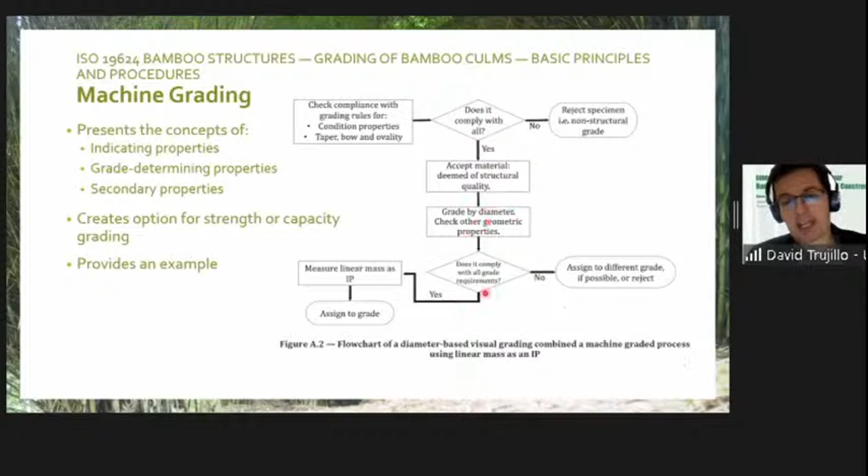When I say machine grading, you're probably imagining something really expensive, but we're probably just talking about these two very expensive pieces of machines - a little scale and a measuring tape. So it's in fact very, very cheap. It could be a very simple procedure, and we're looking to pilot it with a team in the Philippines.

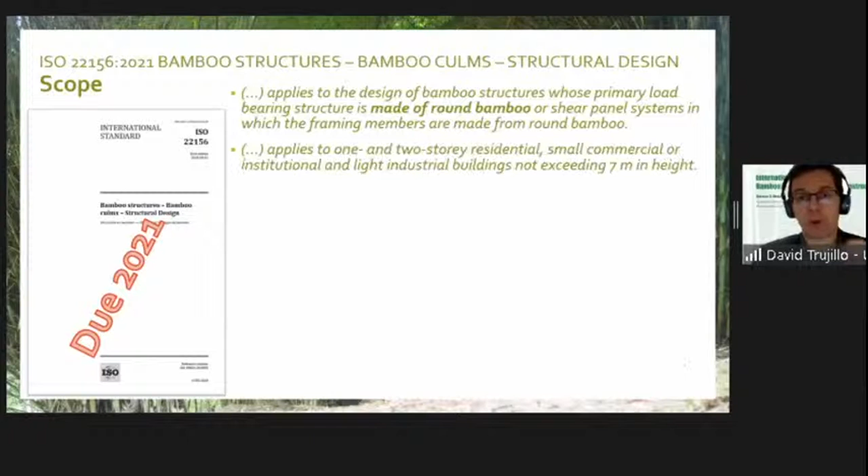ISO 22156 - I'm only just going to tell you a bit about what's coming out. We will be talking about round bamboo only. We are suggesting that it's limited to fairly small structures. It's only concerned with mechanical resistance, serviceability, and durability.

And Sebastian talked a great deal about durability last time. We are mainly going to work around allowable capacity design or allowable stress design, though in the annexes we allow for the use of partial safety factor design and load factor design methods, load and resistance factor design methods. We also allow for previous established design experience, and we also allow for design by testing.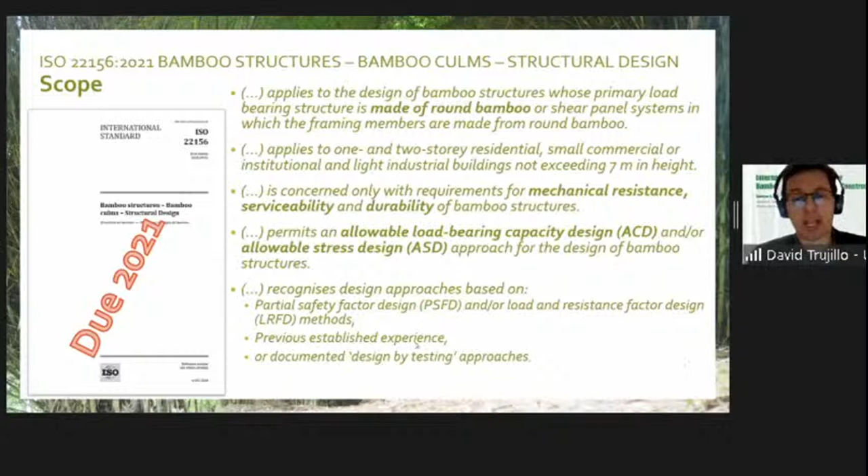We've created use classes and service classes in a similar way to the Eurocodes, and also to the ISO standards.

As Sebastian pointed out, bamboo has little natural durability. This is a photograph I took in Bogota of an example of what happens when bamboo is exposed to the environment. So here you have bamboo degrading quickly when it's being exposed to rain, but this bamboo is performing fine when it's under the roof, which I think complements the point Sebastian was making last week.

As Sebastian said last week, culms must be chemically treated against insect attack and must be protected from rot. We've created, on the basis of ISO 21887, 3 recommended use classes that will require protection by design and chemical preservation. So we fall in line with other ISO standards. We also fall in line with another ISO standard in terms of service classes.

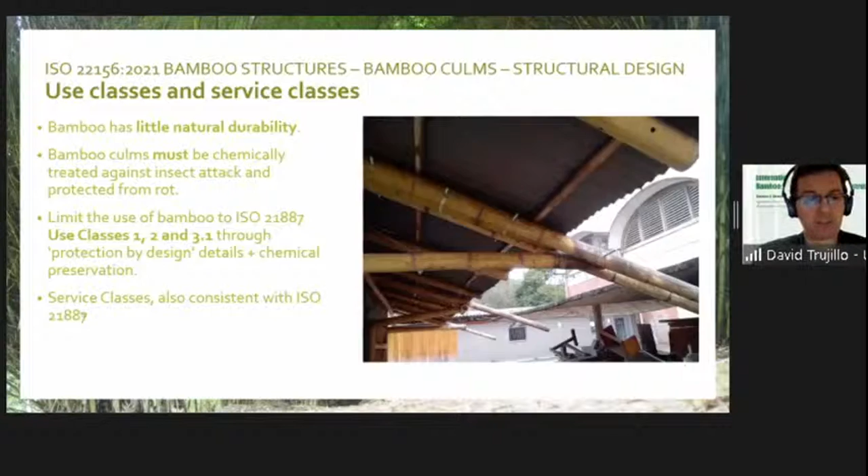One of the things I think is an interesting innovation of 22156 is that we remind designers that bamboo is very susceptible to splitting and that they have to consider it in design. I'm not going to dwell on this too much.

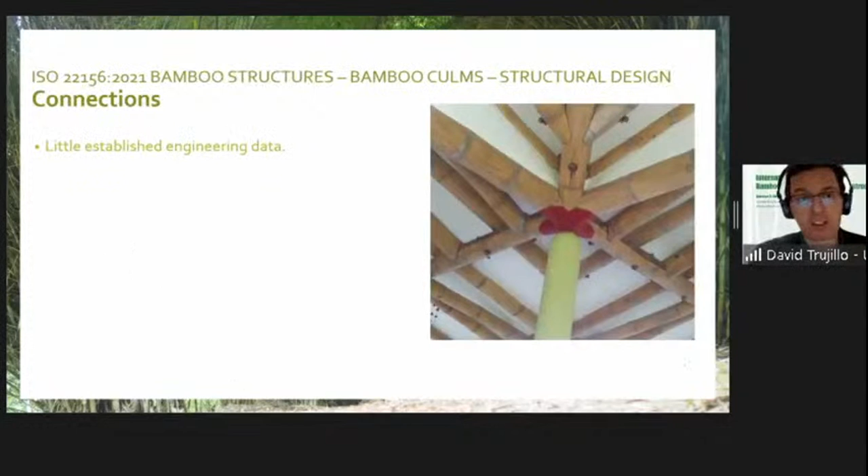We also talk about connections, and because there's little established engineering data, we provide people with a procedure where we allow allowable design capacity calculation for some fundamental cases, and provide some guidance for component capacity or complete joint testing. So if you want to go away and test a connection, we tell you how to go about doing it and how to interpret the result.

And in Annex E, we have provided an extensive classification of connection types. We also allow for the use of shear walls in the style that Luis Felipe has talked about recently, and say how that can be done.

So what's next? As I mentioned, we're looking to create engineered bamboo standards. We want to continue researching - this I speak for myself in this case - connections, shear walls, engineered bamboo products, and capacity grading, and undertaking pilots across the world to take this finding further. We're also looking to create manuals that accompany the standards. At the moment, this is sort of the immediate goal, to create a manual that accompanies 22156.

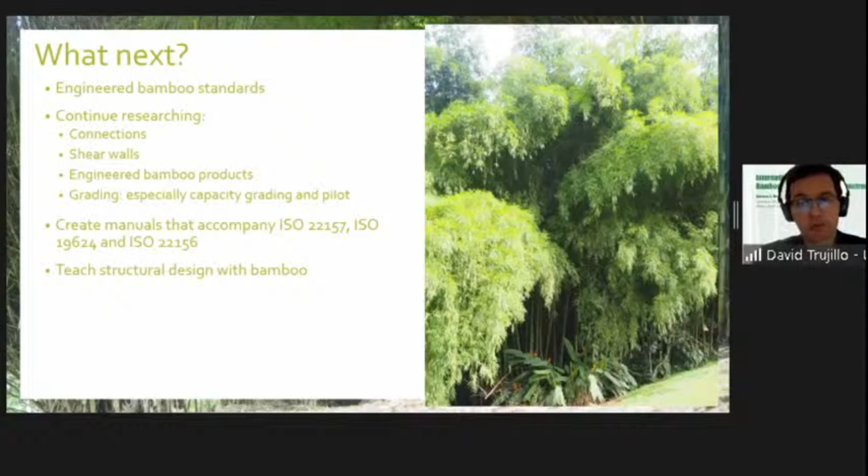Also, we're very keen to teach structural design with bamboo, because once we have ISO 22156, we think it really has to be unrolled across the world so that the adoption of bamboo is as quick as possible. And we want to disseminate these standards and work towards their adaptation and adoption everywhere.

Here's some bibliography if anyone wants to take note of it. Many thanks for listening. Apologies if I went too fast, I just wanted to make sure I covered everything.

Thank you very much, Professor Zhuo. I think it is quite interesting to see from the standards and codes and certification point of view, because we have been working in the bamboo construction sector for quite some time. If we go in for high-end construction and projects of high value, there is a critical requirement for standards and codes. Even if we go for some financing from banks, this aspect is being very well handled.

The standards for grading, particularly visual grading and machine grading, are quite interesting, because in our machine grading we have a measuring tape and a small weight machine, which is quite simple for practitioners to follow. It's also quite important for us to have manuals, because many standard documents are quite hard for practitioners to follow, and they're not accessible for many of them.

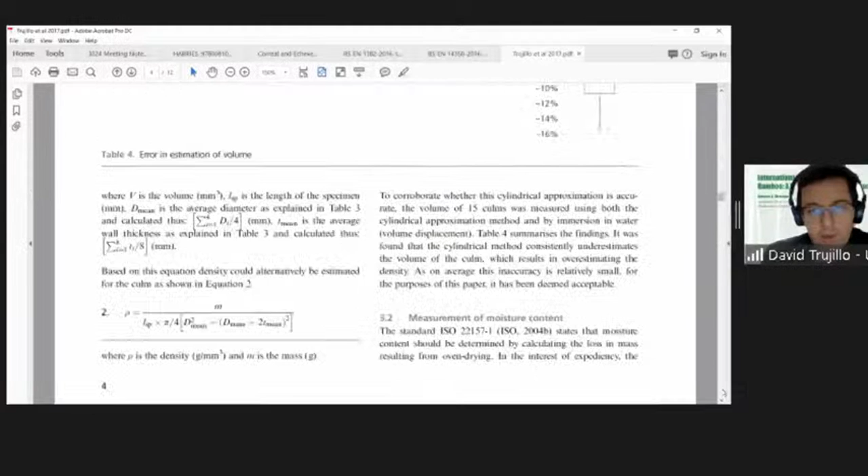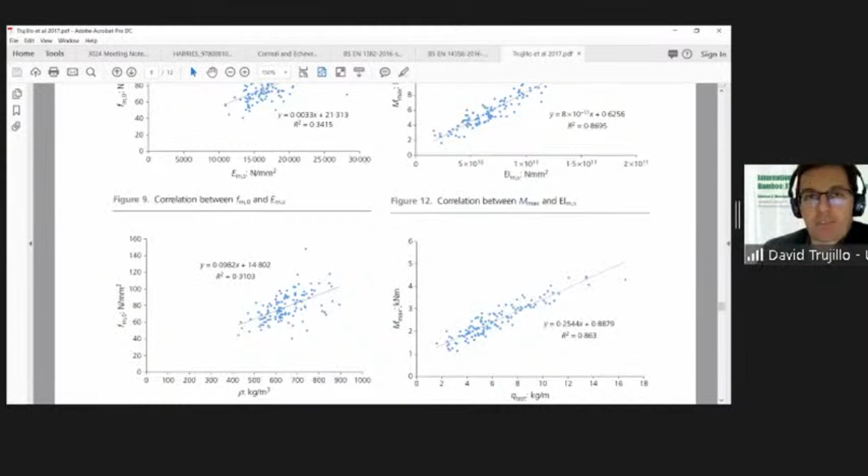Fundamentally, the difference between strength and capacity is an extensive property. In the paper I mentioned, I want to show you the graphs. Here, for example, this axis shows modulus of elasticity expressed in megapascals. You can see the correlation is not particularly good, with an R squared of about 0.3415 when compared to moment versus stiffness or linear mass. Here I have it against stiffness, but we could also compare it against linear mass, and it's significantly better, about 0.863. So this is now a capacity, no longer a strength, because it's a property of the element and not of the material.

So the difference lies fundamentally in the fact that you no longer treat bamboo like a material, you treat it like a product, and you grade it on that basis. Hope I've clarified your doubt.

Thank you, David. Going back to Professor Zhuo, a question from Diego Fernando: which geometric figures could be used, and which ones shouldn't be used, for structural construction? Professor Zhuo, you're muted. Sorry, could you please repeat your question? Yes, this was from Diego Fernando: which geometric figures could be used and which ones shouldn't be used for structural construction?

So you're talking about the form, the shape of the structure. That's what I understand the question to be. I think it can be any shape through design.

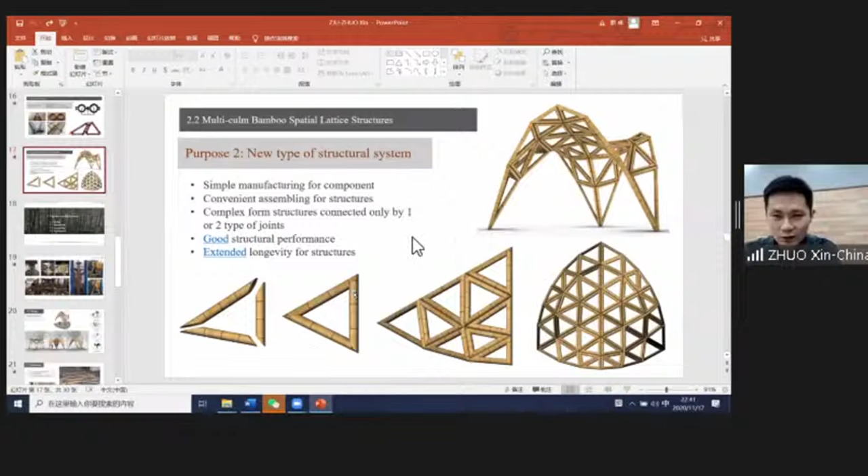And what about the triangle, the other connection detail you showed, connected in a different way with a steel plate? Yes, I mentioned we devised two connection methods: the first is this double ring clamp connection, and the second is the bamboo corner, where the corner of the triangle is infilled with a bent steel strip embedded in mortar. We can choose either of these two jointing techniques. For the four demonstration projects, we used the mortar-infilled technique. We only used the double ring connection technique in our laboratory tests, but we're going to work further on that.

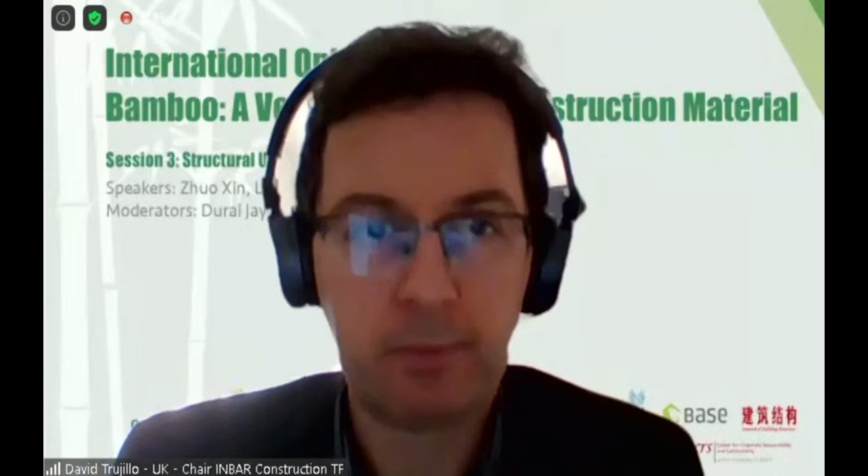Great, thank you, David. Another question for Professor Zhuo: Did you use any structural simulating program for the structural design of either system you've developed?

You can use any commercially available software to analyze this structure, but the only problem is that we're not quite sure about the rigidity of the joints, because it is not rigid - it's actually a semi-rigid joint. So in the future, this is one of our research directions. We're going to conduct a larger number of tests to determine the rigidity of the joints we designed, and once we have that rigidity value, we can input it into any commercially available structural analysis software and it will give us the result.

Excellent, thank you very much. Another question for Luis Felipe from Alexandra.

Did you also look at the charring rate of the bamboo during your fire testing? That's a good question. Unfortunately, the laboratory doesn't have that capacity, so we couldn't measure the structural integrity of the specimens during the fire test. What we did was, after finishing the fire test, we took samples from the bamboo species and tested them. We saw the capacity of the bamboo - there was some decrease in capacity, but the bamboo was still able to carry loads that allowed the house to stay stable and not collapse.

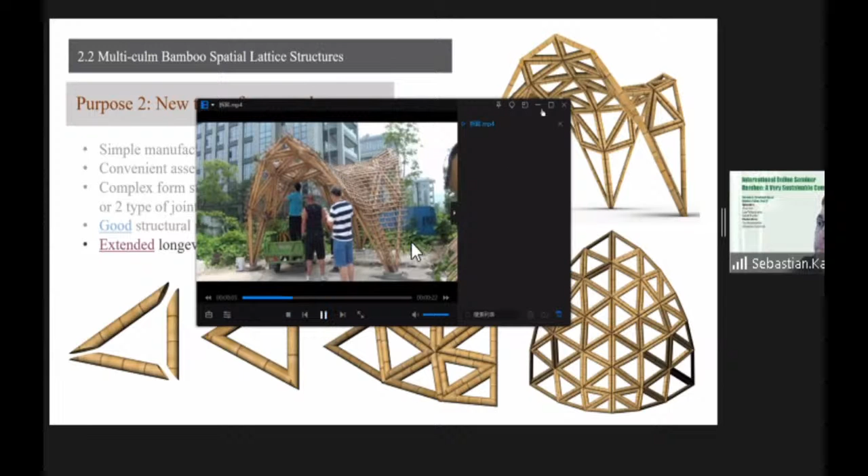So these workers are actually dismantling one of those triangles. You can see in his hand he has 2 triangles, because this structure was designed to be 2-layer. If this is a single layer structure, then what he is dismantling would be a single triangle.

So if we find some part of the structure is degraded and we want to replace it, we can do it like what the workers do in the video. We can do this.

So when this triangle was removed, it still remains a stable structure. It is still a structure.

It won't become a mechanism, because as you can see in the video, every edge of the triangle is shared by two bamboo culms. So if one of these edges is removed, it's okay. It's just weakened locally and temporarily. It won't become a mechanism, as you can see in the video now.

Okay, and we can do this step by step. If there are like 10 degraded triangles that we would like to replace, we can do this one by one to make sure that the whole structure remains stable.

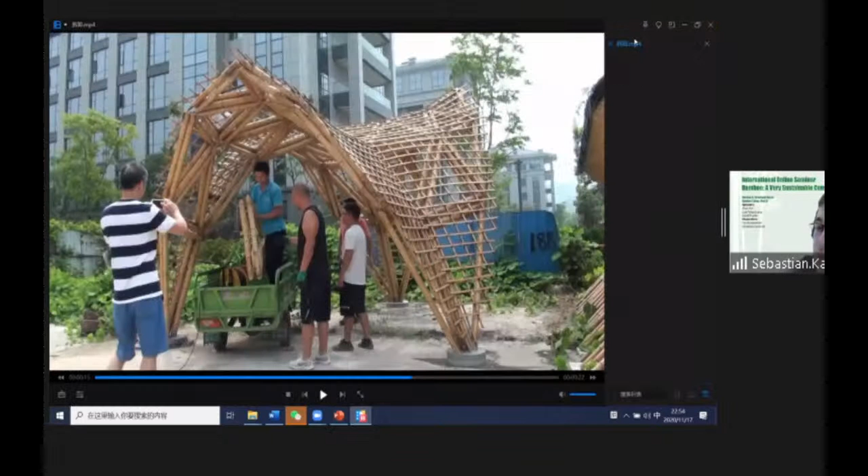In Puerto Rico, Bambusa vulgaris is the most common bamboo. We know it's not very resistant. Which system do you think is the most appropriate to build social houses?

Yeah, very interesting. Right now we are doing some tests to determine mechanical properties of other bamboo species in the Philippines, and one of them is Bambusa vulgaris. There is a lot of Bambusa vulgaris here in the Philippines. It's the most common species around the world, so you can find it in Latin America, Southeast Asia, Africa. It's everywhere. So there are a lot of, I don't want to say myths, but what is clear is there is not too much information about Bambusa vulgaris that you can rely on.

So we started with a very simple test, shear parallel to the grain. It's the first property we already determined. We tested 50 specimens, and it's the same as Guadua angustifolia. I'm talking about shear parallel. We have to wait until we test bending and compression, but at least for shear parallel to the grain, we are talking about the same resistance as Guadua angustifolia, Bambusa vulgaris, Bambusa blumeana, or even Dendrocalamus asper. So I think the myth of the resistance of Bambusa vulgaris is still to be confirmed.

And I had a talk yesterday with David. There is also another myth about the cracking of Bambusa vulgaris that I don't see yet in the laboratory with the specimens we have. So let's wait, because I think the main problem with Bambusa vulgaris could be the content of starch that makes the species very susceptible to insect attack.